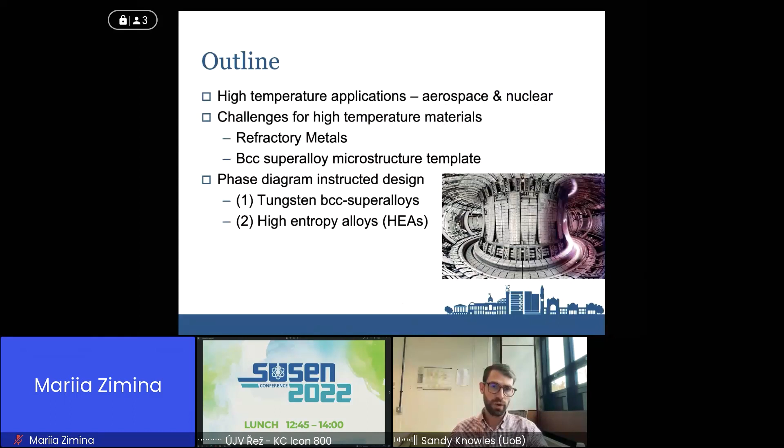So I don't know, I think there's still some aerospace research. I kind of saw at least a couple of colleagues when I was at CVR that are working in aerospace, and maybe other people in the audience have multiple application areas they work in.

But when we're working on gas turbines, we're particularly interested in improving fuel efficiency, and often that comes into improving the operating temperature of the engine. So higher operating temperatures give you improved thermodynamic efficiency. So the same motivations we have in next generation nuclear as well. If you want high temperature reactors, you get this improvement in thermodynamic efficiency.

In aerospace gas turbines, a lot of what limits increasing temperature is materials capability. So in aerospace we work on nickel-based superalloys, where nickel is the main material. Over time these have been continuously improved—every 10 years or so we get about a 50 degrees C improvement in temperature, but it's becoming ever harder to realize. We had an initial, fairly linear progression, but over the last couple of decades it's been really hard to get much improvement in nickel superalloy properties.

As a research group working on aerospace materials, one question is: what are we doing? Have we hit some physical limit, or are we just getting iterative improvements where the more money we spend, the more improvement we get? Or are there fundamentally new materials we can consider that might give a step change in performance? I think now, going from kerosene-based gas turbine engines to hydrogen gas turbine engines, this might be the point when we start really looking at fundamentally new technologies.

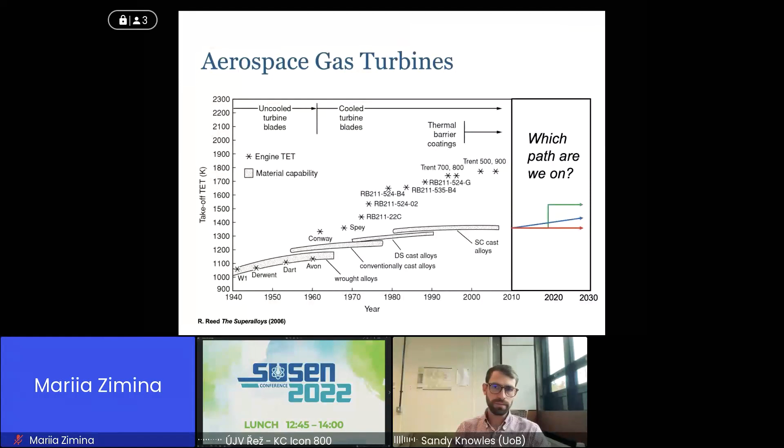Looking towards DEMO, which might be 2050, or alternatively some private companies doing fusion—like Tokamak Energy in the UK or Commonwealth Fusion Systems out of MIT—these companies are targeting feasibility by 2030 and power by 2040. But regardless of reactor type, plasma physics, or reactor geometry considerations, the key question is which materials can function in a power plant under fusion-spectrum neutrons for 20 years.

That's really something we don't know—how our current suite of materials would perform in a fusion environment. We're doing everything we can to demonstrate them, but there's probably also going to be a need for some fusion-optimized materials, made for both temperature requirements and radiation damage.

The last application our group works on is next generation fission. There are similar motivations around thermodynamic efficiency, improvements in reactor conditions, and waste production. Something we're particularly interested in is the benefit of high temperature processes for hydrogen production—if you look at reactor temperatures more in the range of 800 to 1,000 degrees C, it opens up new thermochemical processing routes for hydrogen, which would be a very good way of making low carbon hydrogen.

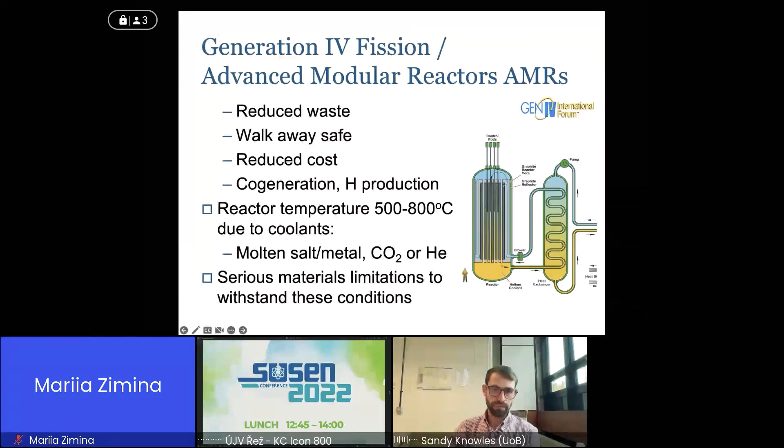This leads us to: what's so hard about meeting the requirements of high temperatures? One thing is we just need something that's not going to melt, but we probably need to go further—it needs the right mechanical strength, we need to think about creep, damage tolerance, fatigue, and environmental resistance, including corrosion, oxidation, and also radiation damage.

And also, can we really manufacture it at the scale we need, as well as at adequate cost? This is originally benchmarked for nickel-based superalloys, more for aerospace, which do pretty well on all of these criteria. They're pretty expensive, but otherwise a pretty phenomenal material.

If we go to a new materials class, something like silicon carbide composites, which are also considered for Gen 4, you get some benefit in strength and creep resistance, but maybe that's at the detriment of cost and processability. So whenever we're developing a new material, we have to try to ideally balance out all of these different properties.

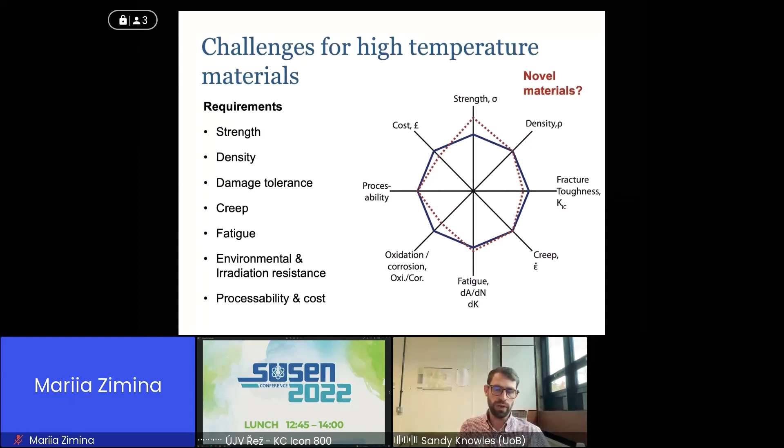So it's not just designing for a single parameter, we have to try and design for all of them at once. And we're really trying to get novel materials where it's not a complete sacrifice. Maybe it gets a good benefit in strength, but you don't lose out in other parameters.

So for us, we take a lot of inspiration. I did my PhD in aerospace materials and previously worked briefly at Rolls-Royce, so we take inspiration from aerospace and try to bring that into the nuclear sphere.

Some people in the audience might be familiar, but I'll give a brief introduction to what nickel-based superalloys are. These are materials that have exceptional high temperature strength, creep resistance, and oxidation resistance. Fundamentally, these are comprised of FCC nickel as a matrix phase, and this intermetallic, nickel-3-aluminium, which gives you a composite benefit almost, where you have a very high strength intermetallic phase and a ductile matrix phase.

And you get these cuboidal bricks and mortars, where the bright cubes are the intermetallic and the channels are this gamma. So you have a very high volume fraction of precipitates.

And we can design these alloys fundamentally instructed by phase diagrams. So I spend a lot of my time going into different phase diagrams and trying to understand how we can use them to design and control microstructures.

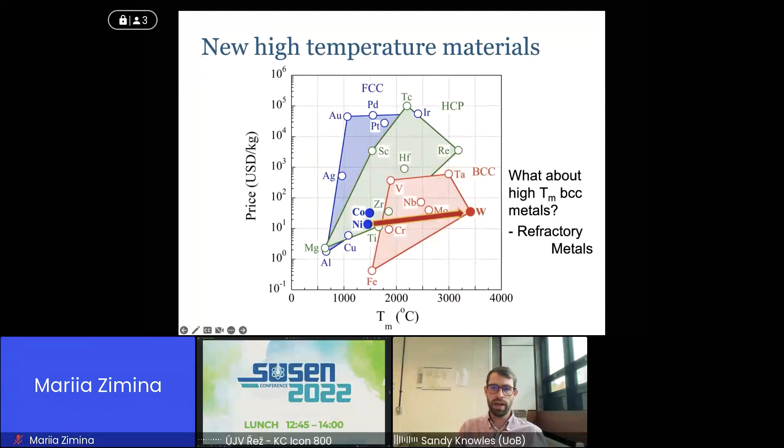So going there, we've run out of FCC metals. We can't take a direct analogy to nickel-based superalloys, but we consider, well, what about some of the other high melting point metals? We could particularly jump, rather than being FCC, to BCC. So we have all of what we call the BCC refractory metals, and particularly things like tungsten. So why not consider these high melting point metals?

And we asked the question of, well, if this gamma prime microstructure is so effective, is there an analogy to consider a BCC based system, so a beta prime? And this is what's kept me busy for, I guess, coming up to 10 years now, working on this concept of BCC superalloys. We're really trying to take inspiration from gamma prime, but now that we've changed to a BCC base, we also need to change our intermetallic species.

So we have our kind of BCC unit cell that people may be familiar with. There's lots of different metals that we can have as our base BCC matrix. And then we can consider, well, what is a beta prime intermetallic?

The simplest one is what's called the B2 crystal structure, where the center atom is ordered and your corner atoms are different species. So things like titanium iron, or more commonly, nickel aluminium. There was a huge amount of work on monolithic nickel aluminium, so nickel aluminides, through the 90s for aerospace applications.

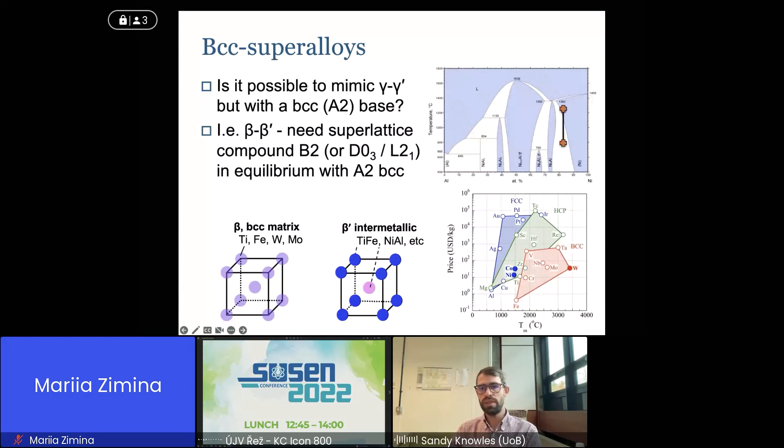So there's many of these B2 or beta prime intermetallic species, but one of the real challenges is, if we try and do the same thing we had in nickel alloys, we need this equilibria between BCC and the intermetallic.

So we can ask which systems, is there just a binary system that directly gives us this kind of beta-beta prime structure? One of the only ones really is technetium. So tantalum technetium, titanium technetium do have a two-phase field between BCC and the B2. But technetium has no stable isotope, so it's not something we're going to be making engineering structures out of, but very interesting from a scientific basis, or maybe for medical treatments and things like that.

So the only binary system that really works towards a beta-beta prime structure is the titanium iron system. This was what I spent a lot of my PhD researching, and we still have ongoing projects trying to understand that as a binary system. You'd think iron metallurgy and titanium metallurgy, this would be a quite well-determined system, but actually people haven't mostly been interested just in the edges of the phase diagram and not this kind of region in the middle and quite what happens there.

But what we found is that you can have an equilibria in high temperature titanium alloys, so beta titanium, which are used commercially. If you keep adding even more iron, at some point you get to the point where you form this titanium iron intermetallic.

And so we've done a number of bits of work looking at trying to use this binary as the base to create a beta-beta prime or a beta titanium BCC superalloy. So taking the titanium matrix and having precipitation of titanium iron, you either get some spherical or lamellar precipitation structures. So we've done work looking at the strength and the formation of these kind of microstructures.

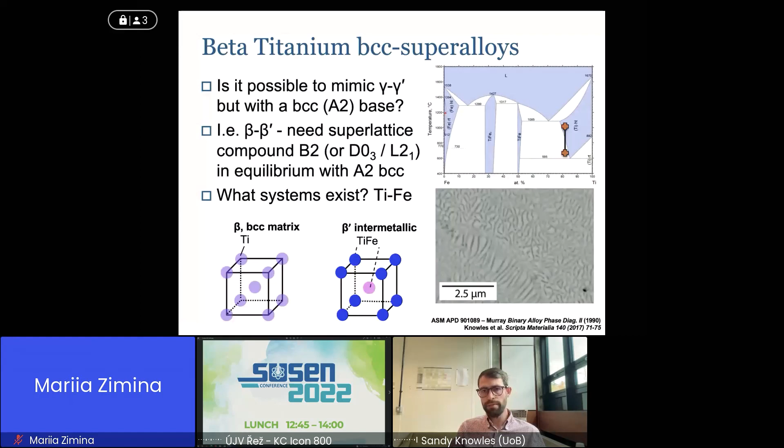Taking in the rest of the literature, we're not the only people to have pursued this kind of BCC superalloy concept. So there's other systems, but none that have really reached commercial maturity. And hopefully there's a few different directions we could go in that maybe could get us there.

One of the ones that's picked up quite a lot of interest internationally has been refractory high entropy superalloys. This was a review paper, a Perspectives paper just published last year or so, two years ago. And at some of the major conferences, you're now seeing quite a lot more people looking at these, what I would call high entropy BCC superalloys.

So you can get this kind of gamma prime cuboidal sort of structures. So certainly something that's seeing widening appeal in the scientific literature.

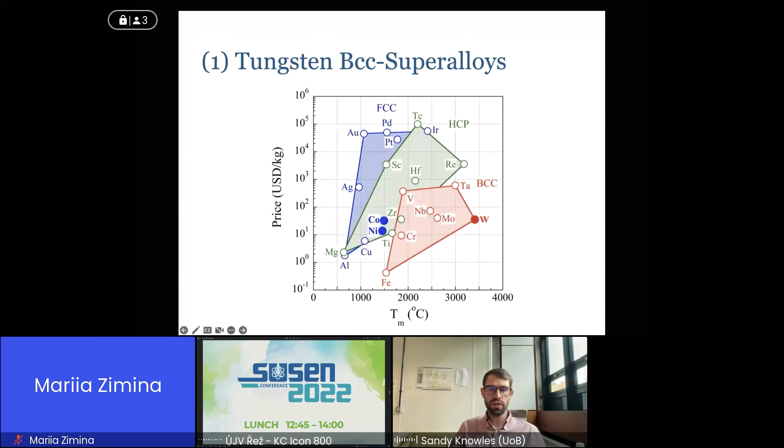So we've been applying this BCC superalloy concept to another system. We previously worked on titanium alloys, and then, as I was mentioning, around this Eurofusion project we had on nanostructured tungsten. And during that, we wanted to have tungsten with precipitates. So we tried to see if we can apply this BCC superalloy concept.

So we got the motivation of BCC as high melting point. Essentially, this beta prime could be a reinforcing phase, but we also have interest in terms of the interfaces towards radiation damage. Well, the challenge we had is that there wasn't very much prior study of this system. I guess that's probably what interested me in it.

And one of the questions we had is, is there this kind of equilibria between BCC tungsten and titanium iron? And this would be, are BCC superalloys even possible? And so then the next question is, are they useful? And I guess we're still answering that question, but they're certainly possible.

In this kind of study, one of the things we were doing was making real alloys. So we have alloys going from tungsten rich with 20% atomic titanium and iron, and these kind of go across in increasing titanium concentration.

What was interesting, and we were aware of but didn't know if we would see it, is that there's also a second or third phase of BCC, which is BCC titanium. So as well as having this two-phase miscibility gap between having the beta prime, there's also a spinodal reaction, so you actually have a three-phase structure: two BCC phases and then this beta prime titanium iron.

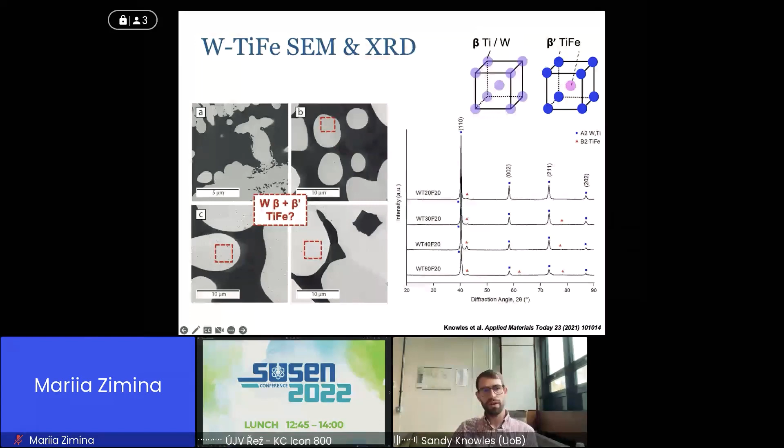But in having done it, we were interested within the dendrites, so the tungsten rich phase, we could see there was kind of a secondary feature within those dendrites. One of the things was just porosity, but it didn't really seem consistent with that from the imaging. The question was whether this is the beta prime microstructure we were really seeking.

So we could zoom in and do TEM to validate both the chemistry and the crystallography, and we found that we do indeed have this beta-beta prime structure. And we could start to probe into the performance of the alloy.

Whilst we've done this experimental work to determine the phase diagram, we can take that into a CALPHAD thermodynamic assessment. The ultimate aim is to try and do more prediction on these alloys, but if you don't have an understood phase diagram, you can't use many of the current predictive tools. We're trying to develop that predictive capability.

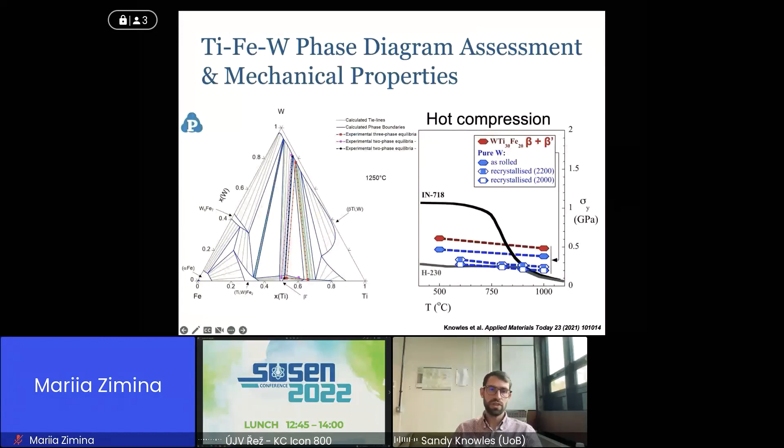We also then started looking at some mechanical behaviors. In these, we're doing just hot compression, but up to 1,000 degrees Celsius, and we're seeing massive benefits over state-of-the-art nickel-based superalloys or tungsten as a direct analog. So there's an advantage to having this tungsten material as well as having the beta-beta prime microstructure.

The secondary interest for us, as well as trying to get the mechanical reinforcement, is also to create interfaces. Between beta and beta prime, you'll either get a coherent or semi-coherent interface, so some interfacial dislocations and interfacial strain, and potentially that could be hugely beneficial for irradiation damage.

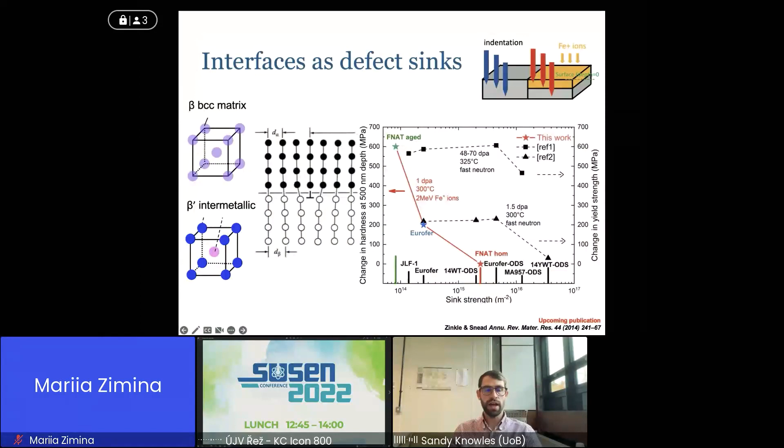There's a lot of work on oxide dispersion strengthened materials, which shows that if you have sink strength, so high area density of interfaces, this can help reduce irradiation hardening, and hopefully that can improve your irradiation damage tolerance. So we have a number of bits of work looking at creating nanostructured materials and understanding the irradiation performance.

Particularly, there's lots of very good irradiation facilities at CVR. In Birmingham, we're very fortunate to have our own cyclotrons, so we can do proton irradiations up to temperature, as well as getting upgrades for in situ corrosion and mechanical loading, including high temperature.

And we've received, and I think by the end of the year it will be operational, a neutron accelerator. I think we can still get up to 0.1, maybe a bit more DPA, so we can start to do some irradiation studies as well as neutronic studies.

This is probably one of the higher energy accelerator, high energy and damage levels for an accelerator system, compared to if you go to reactor-based systems where probably you can get some higher damage levels. But there are differences in terms of the energies involved as well.

So I'll do a whistle-stop tour through also on high entropy alloys. This has been an area seeing massive research in the community. Nickel-based superalloys, which are used in every single jet engine and fund many research groups internationally, there are now more papers published on high entropy alloys than nickel-based superalloys. So scientifically, they've become very interesting.

I think there's a fair few patents out in this space, but I haven't yet seen one fully commercialized, though they are massively catching interest. The idea in a high entropy alloy is this concept of, rather than having a single base element, if we consider this kind of a ternary diagram, but it also extends into higher order compositions. So we first were talking about tungsten alloys.

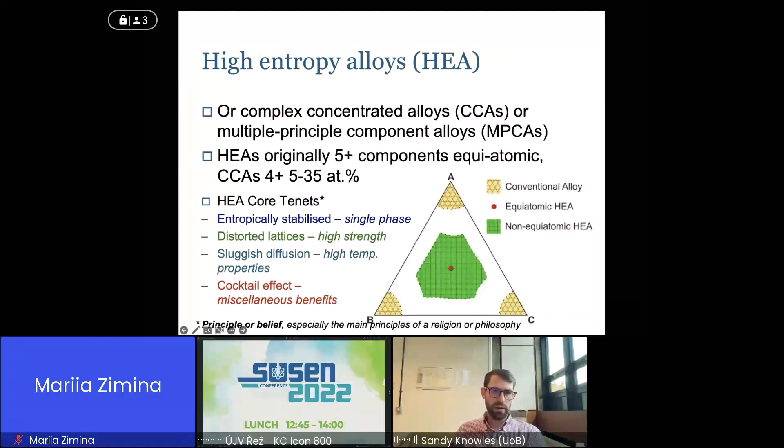So in high entropy alloys, there was this idea that it's because you're mixing lots of elements together that you're gaining an entropy, and hence the name. So maybe you get entropic stabilization.

And there's a number of other benefits that seem to be coming out of this, particularly towards high temperature strength and slow diffusion. And also one of the ones that catches a lot of my interest is that quite a number of high entropy alloys are showing a very good irradiation damage tolerance, potentially much better than conventional materials. So that's a very interesting concept for us to understand and also to exploit.

The challenge with high entropy alloys is you can have any high entropy alloy, you can just mix any element you like and put them together. Maybe if you put 4 or 5 plus, that is a high entropy alloy, and that means we have almost an infinite number of possibilities of how many high entropy alloys we can make.

So if we're going to choose a new research study, we could potentially take a good starting point. So we've got the Cantor alloy, which we could look at and take as a starting point. I quite like the joke one, we could play dartboard metallurgy and design a different master's project or summer project, and we could just throw darts and pick elements. So we could do zirconium, vanadium, molybdenum, zinc, or something like that, and that could be a new high entropy alloy, but probably we need to be a bit more scientific than that.

We can use things like CALPHAD thermodynamic predictions, or maybe some other modeling methods. So all of these have challenges, particularly in CALPHAD, as we were saying in the tungsten-based superalloys, is one of the challenges. If you don't have the prior data, you can't make a good prediction.

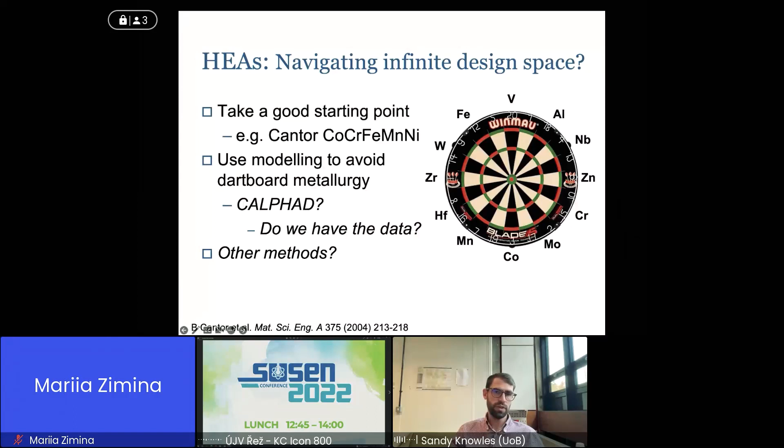So we've been looking at some high throughput modeling screening methods. So put my hand up, I'm an experimentalist. I was working with Dan King and Simon Middleburgh on this. They're the sort of modelers, and trying to use this.

This was actually a data library approach, looking at atomic size misfit as well as then your propensity to form a solid solution. So your Gibbs free energy of mixing versus intermetallic formation. So we have these 2 parameters, things with not very large atomic size misfit, as well as a low driving force for intermetallic production.

And the nice thing was with this approach, which the code is publicly available, we could screen, in this case, 100,000 compositions, and we've subsequently done another study where we've done over 1 million high entropy compositions. And we were interested in both those that might be a single phase solid solution, as well as ones which might have a low thermal neutron cross-section.

So particularly we were interested in these as potential fuel-clad materials. So we came across this system, niobium, titanium, vanadium, zirconium, and noticing that of those 4 elements, zirconium is probably the lowest neutron cross-section. We then did the derivatives looking at changing the zirconium concentration to change the neutron cross-section.

Having defined these compositions in this system, we applied CALPHAD to see how well it predicts behavior. It predicted a single phase: as we go down in temperature, first you're liquid, then you form solid BCC, with a large temperature range in which BCC is stable. At low temperatures, we might get some mixture of phases between Laves, spinodal, and HCP.

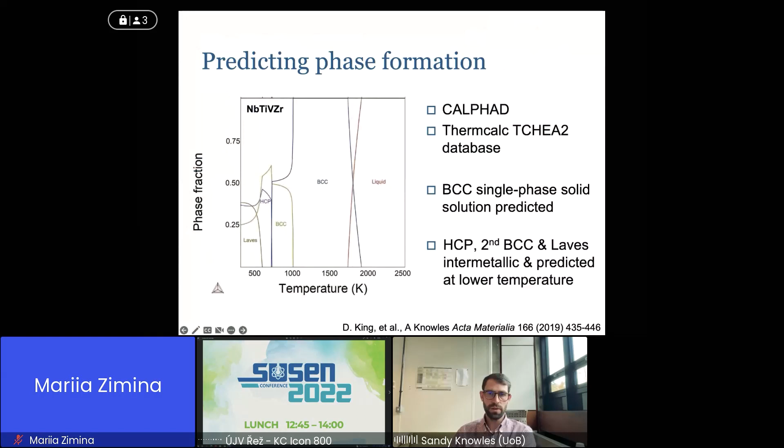We then produced these alloys experimentally. One caution with many high entropy alloys is how they're produced, often with very high cooling rates, raising the question of whether they're truly stable. Since we want to use these materials in a nuclear reactor, they'll sit at high temperature for a long time, so they need to be temperature stable.

In this system, we found that these niobium, titanium, vanadium, zirconium high entropy alloys are single phase stable at 1200 degrees. So they do meet this criteria of being a high entropy alloy, suggesting there is potentially some entropic stabilization involved.

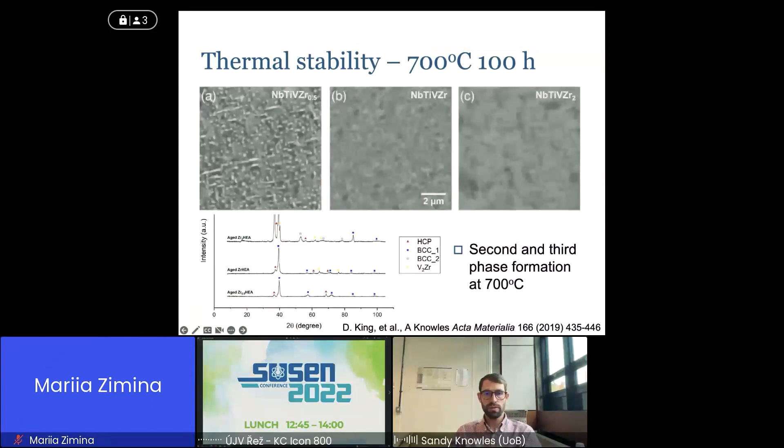However, wanting to move toward reactor operating temperatures, at 700 degrees C you get precipitation forming second or third phases. Depending on the composition, particularly zirconium concentration, we got differences in microstructure, including some spinodal, some HCP formation, as well as Laves phase formation.

So we went into more detail to work out exactly which phase is which, going into TEM, doing composition analysis, and linking that to the XRD and diffraction to identify the phases.

We then went on to compare the base mechanical behavior, in very preliminary studies just looking at hardness. These alloys are about twice as hard or twice as strong as the zirconium and steel currently used. So you might argue that if you can make things a bit stronger, you can also make them a bit thinner, so there may be some advantages there.

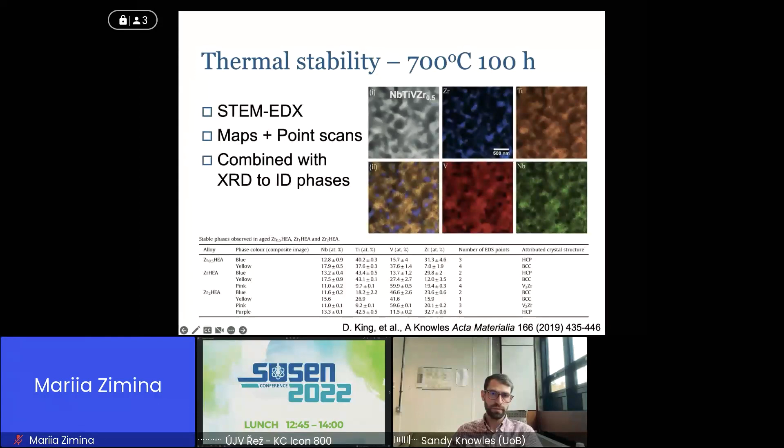Having multiple phases isn't necessarily a problem for us. We're also interested in high entropy alloys that have precipitates - in the same way we had nanostructured tungsten, why not have nanostructured high entropy alloys? We could use these second phases for improvements in mechanical strength and high temperature strength, as well as irradiation damage resistance. So we have a number of different projects.

We've just had two PhD students start, and we've got two postdoctoral research fellows working in this area, particularly around whether we can control and optimize the phases and get the best balance of mechanical versus irradiation performance.

We also have interest toward fusion and reduced activation high entropy alloys. For fusion, certain elements become very active, which would mean your entire fusion reactor becomes long-lived radioactive waste, defeating some of the initial motivation for fusion. So we're looking at compositions that would meet the criteria of ideally becoming low-level or low-activity waste after just 100 years.

To summarize, we've been exploring these concepts of BCC superalloys and high-entropy alloys, particularly using phase diagrams to instruct the design. Generally we're finding that they are possible and interesting, and demonstrate high strength, but there are some challenges in ductility, particularly in tungsten-type BCC metals. So we have a lot of work focused on designing for toughness and microstructure, as well as linking that into irradiation and environmental resistance.

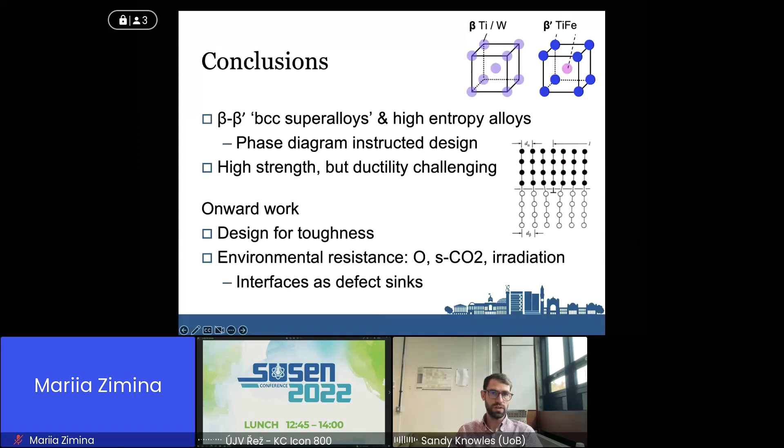Happy to take any questions.

Thank you, Sandy, for an extremely interesting presentation on another set of materials, which are, as you said, now largely being researched - high entropy alloys.

So is there any question? I would say it's because it's after lunch, you know, but our audience is a little bit shy.

I know that you have been lately in CVR, and you are also working on COMPASS with our colleague dealing with materials for supercritical CO2, so we have really a large portfolio. Just out of curiosity, did you come to some common ground that our collaboration will continue or might continue also in the direction of, for example, high entropy alloys?

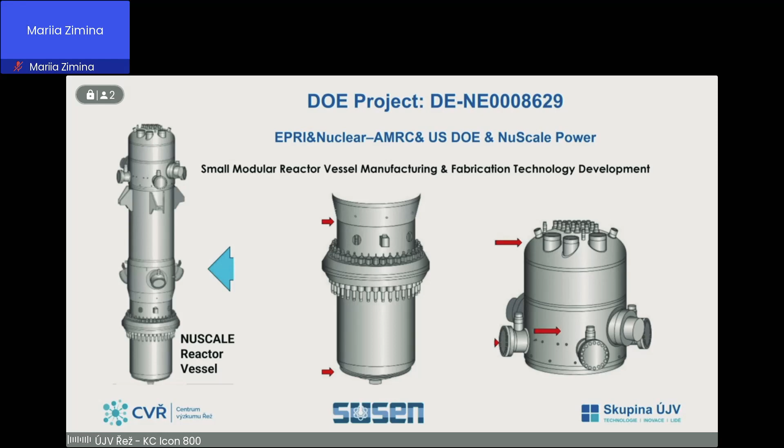In this part of my speech, I will talk about the technology for production of thick-walled components from metal powder, which is consolidated by isostatic hot pressing. With this technology, it is possible to produce near net shape and very complex components, which reduces overall machining time and material cost. This technology is ideal for manufacturing components with multiple penetrations, such as reactor heads. It also produces very homogeneous microstructures, has excellent inspection characteristics, and in some cases you can actually eliminate welds.

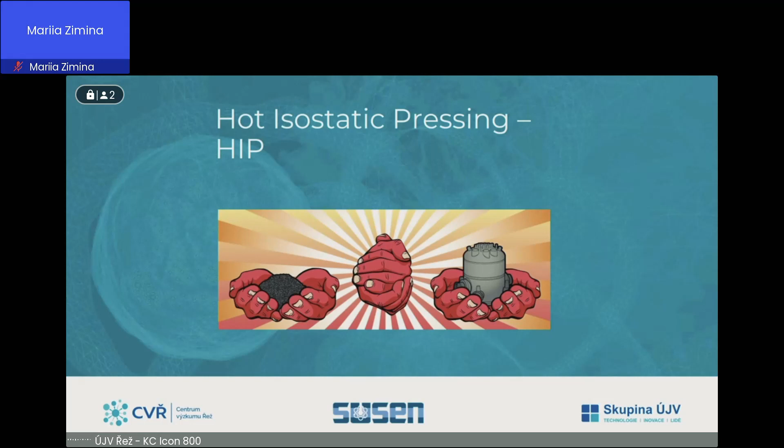There are many ways to use hot isostatic pressing. The most common is densification of products—densifying castings, 3D printed parts, or parts produced from metal injection molding. Another way of using HIP is to consolidate powder, called PM HIP, where metal powder is consolidated in a canister or mold into a solid piece.

In this way, you can design a part with near net shape. Diffusion bonding is the third way to use HIP, which creates seamless diffusion bonds of similar or dissimilar materials with different melting temperatures.

What is hot isostatic pressing, or HIP? The definition of the process is to apply a pressure distinctly higher than the yield strength of material at the HIP temperature. So we have high pressure and high temperature, and at this elevated temperature the yield strength of the material will be very low. We all know if we apply a stress higher than the yield strength to a material, it will drastically deform.

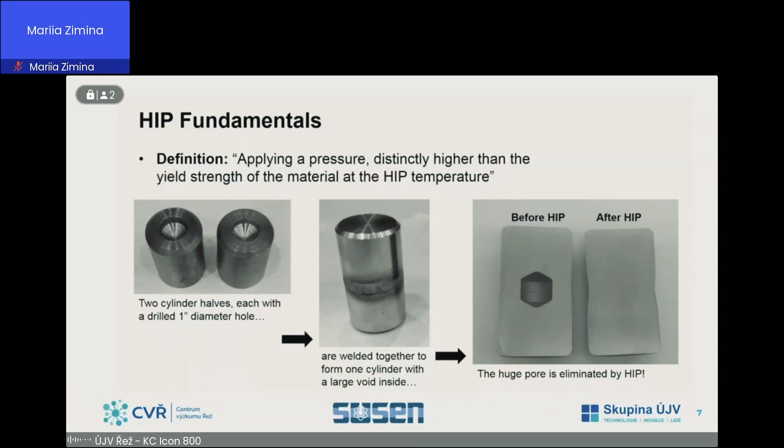Hipping will also eliminate internal defects. Any surface-connected porosity or surface-connected feature will not be eliminated by the HIP process, since the pressure medium can penetrate this feature.

The shrinkage in the process corresponds to the amount of densification we have. So, for example, if we have material with 2% porosity in the part, and we hip it to 100% density, we will get 2% shrinkage by volume. If the porosity is homogeneously distributed in the material, the shrinkage will be homogeneous all over the part.

The HIP furnace can be made for several different materials for different temperature ranges, for temperatures up to 2000 degrees Celsius and pressures up to 2000 bar. The density of argon at this high pressure and high temperature is very close to water. The densification process is a combination of plastic deformation, creep, and diffusion. Isostatic pressure means that the same pressure is acting on all component surfaces in all directions, and it is achieved by a gas pressure medium.

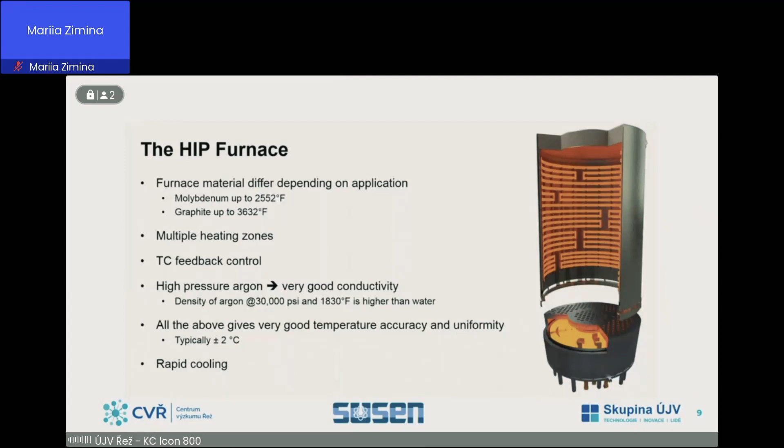The production process HIP begins with the procurement of steel powder used for the manufacture of nuclear reactor pressure vessels, for example steel 508. For filling the mold, canister is needed the metal powder, atomized at gas, with spherical morphology and in a very wide particle size distribution.

Then we have to encapsulate this powder, which is based on creating a mold. When the mold has been created, we can essentially fill the powder into the mold. After that, we need to remove the atmosphere via some degassing process, either cold degassing or hot outgassing. When we have the powder in vacuum in the mold, it is ready for HIP consolidation.

In the case of steel 508, at temperatures in the region of 1160 degrees Celsius and argon pressure of around 100 megapascals. This is followed by heat treatment. The last operation is the removal of the canister, done either by pickling or machining.

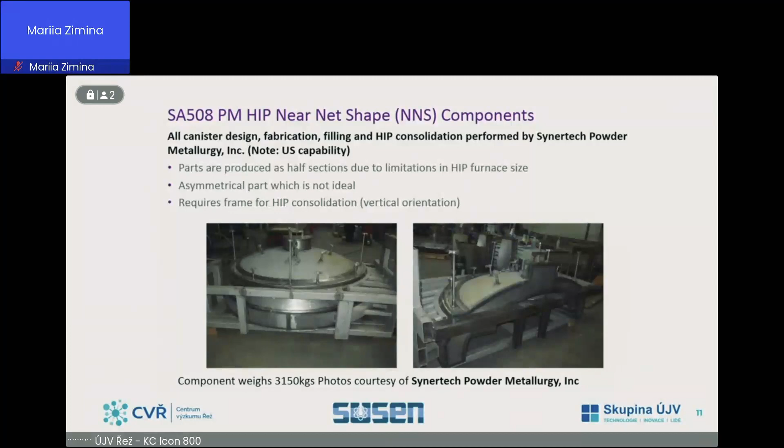The other very important technology for production of components for energy and nuclear industry is electron beam welding.

Electron beam welding is a joining process that is commonly performed under high vacuum, approximately 10 to -4 torr, in a suitable chamber. The chamber prevents scattering of the electron beam during welding and shields the high-energy X-rays emitted during the process.

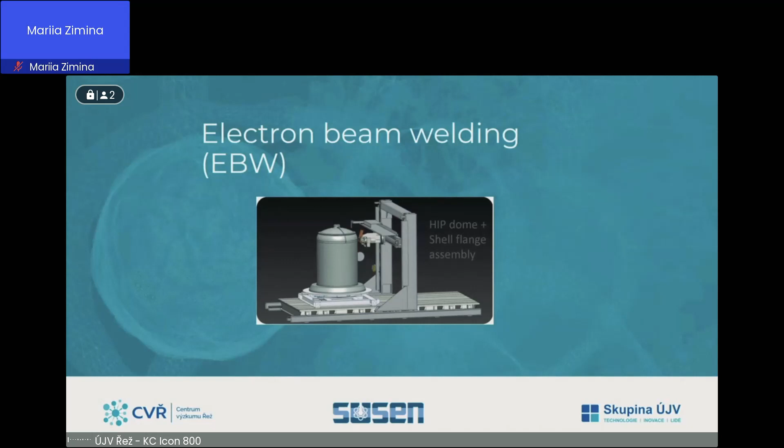Electron beam welding process is extremely efficient, and welding time can be reduced 100 times over conventional thick section welding processes. Post-heat treatment effectively recovers the properties in the fusion zone as well as the heat-affected zone. Heat treatment provides properties similar to the base metal properties while eliminating the visual evidence of the weld.

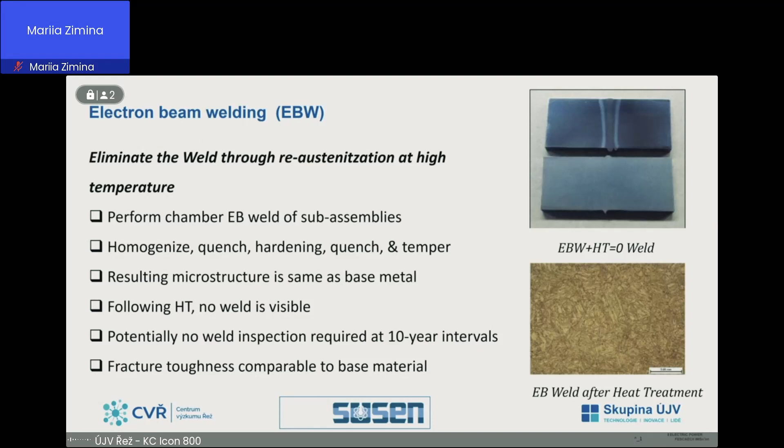Research in the Nuclear AMRC welding vacuum chamber has demonstrated that electron beam welding can provide an acceptable joining method for reactor pressure vessel materials, both forged and produced by powder metallurgy.

Conceptual design of the device for welding the NuScale power reactor pressure vessel is shown in this picture. The design uses individual modules that can be stacked and destacked to form the vacuum chamber, wherein various sections of the small modular reactor vessel or other component will be assembled via electron beam welding.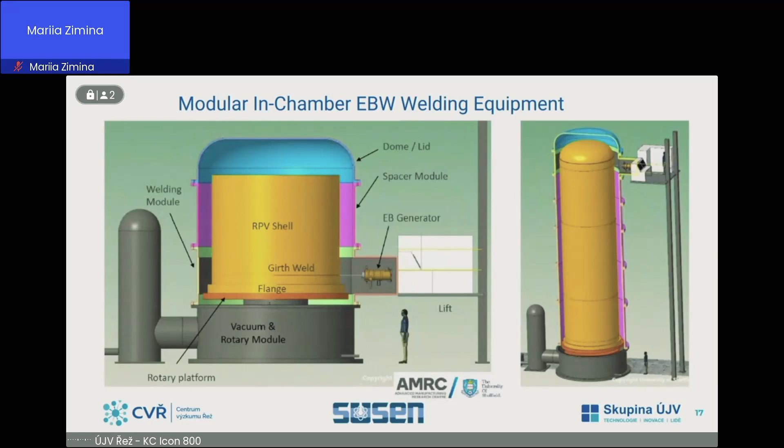In this picture, you see welded lower assemblies for the NuScale power reactor vessel with welded joints flange to shell and shell to dome head.

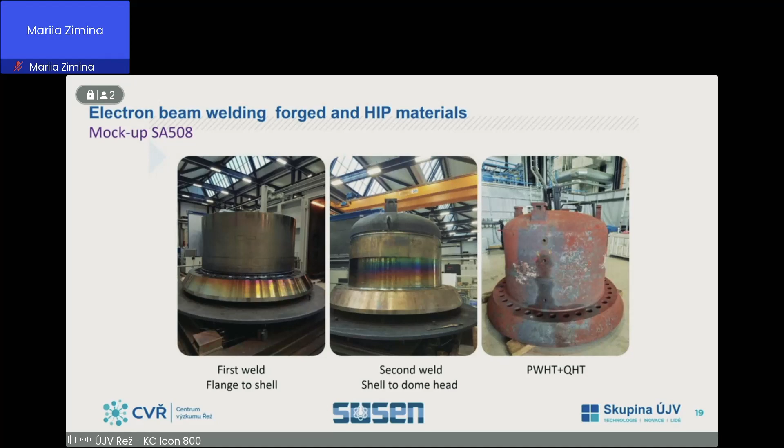Now, several words about metal additive manufacturing. Additive manufacturing is the process of manufacturing a solid object of any complex shape using a digital model as a guide to add layers of material.

Additive manufacturing today represents a range of new manufacturing technologies that have already found application in many industries. One of these technologies is 3D printing. The Electric Power Research Institute issued a technical roadmap for the implementation of additive manufacturing of metallic materials in the nuclear industry under the Advanced Nuclear Technology Program. For 3D printing of metal components, powder bed fusion and direct energy deposition technologies are at the most advanced stage of development now.

Powder bed fusion is an additive manufacturing process in which thermal energy selectively fuses areas of the powder bed. Technology advantages are the ability to create complex geometries that cannot be produced by conventional manufacturing methods, and the ability to produce functionally graded materials in which the chemistry or structure gradually changes as a function of position.

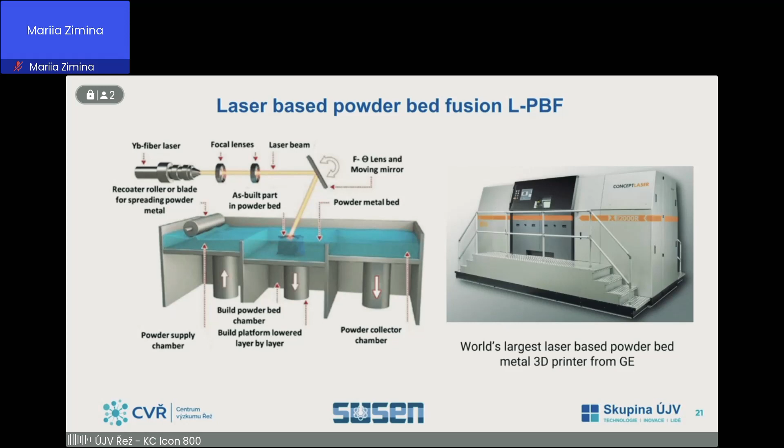Another additive technology is directed energy deposition, which is an additive manufacturing process in which concentrated thermal energy is directed to melt deposited materials. The process consists of depositing individual layers of powder produced by a gas atomization process, with thickness of approximately 0.25 millimeters.

Advantages of this technology are a higher deposition rate, allowing the production of larger components with mass up to 250 kilograms. Mechanical properties of such components, such as tensile strength, impact work, and hardness, have been shown to meet or exceed the properties of the same type of forged material.

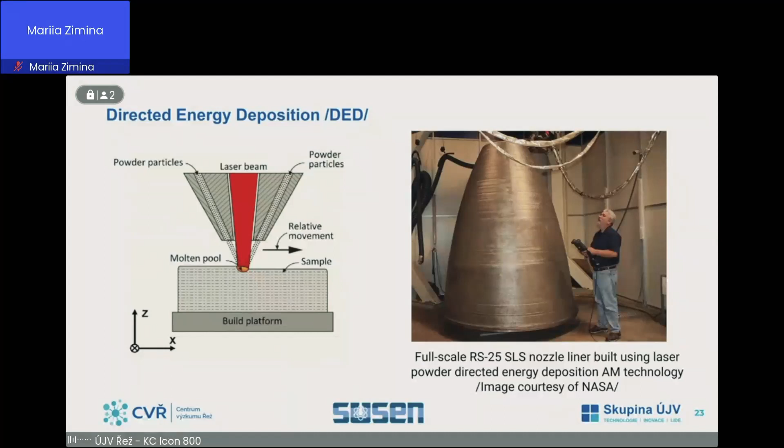And the last technology I would like to say something about is diode laser cladding. Laser cladding is a deposit overlay technology which uses a high power industrial laser to melt or weld material into a substrate, creating an overlay with true metallurgical bonding.

Laser cladding is a very competitive alternative to traditional arc-based cladding methods. Due to much lower heat input, the technology can be used for cladding large surface areas, and can also be expanded to applications like repair or additive manufacturing. Almost all types of lasers can be used for cladding, but diode lasers offer many advantages thanks to their relatively low cost of purchase and operation.

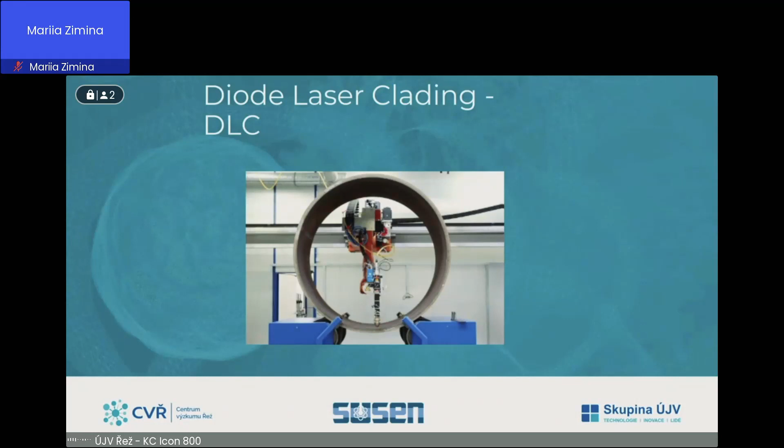The main potential advantages of diode laser cladding are: it can be used out of position, whereas conventional cladding is performed in the downhand horizontal position only. Significantly smaller amounts of cladding powder are required, which could lead to substantial cost savings over conventional processes. And weld dilution is substantially reduced over conventional welding methods, resulting in a much smaller heat-affected region.

The potential cost savings from this technology is substantial, assuming that the thickness of cladding can be reduced by over half compared to conventional cladding methods. For the NuScale power reactor, which is clad over both the inner and outer surfaces, the amount of cladding surface area is projected at almost the surface area of 2 Olympic-sized swimming pools.

The nuclear MRC operates a 15 kilowatt laser line fiber coupled diode laser, controlled by a large gantry-mounted robot manipulator within a 10 by 10 by 5 meter space, safely and reliably.

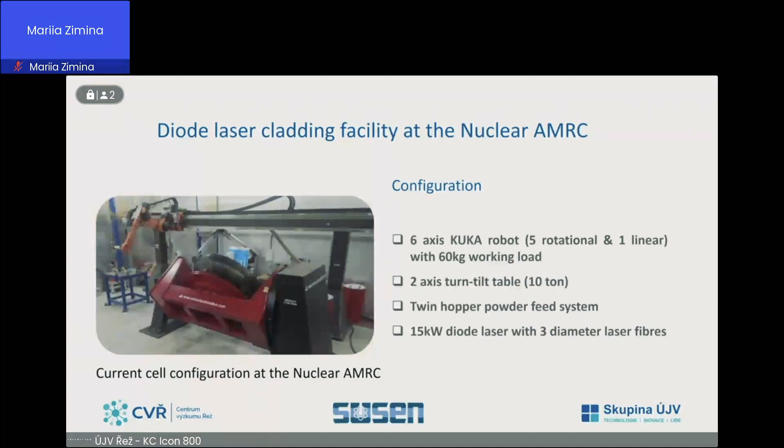The cladding procedures are being developed using 3 welding orientation positions as described in ASME section 9: 1G flat, 2G horizontal up, and 3G vertical. In the picture you can see deposited layers of austenitic steel 308L on the base material.

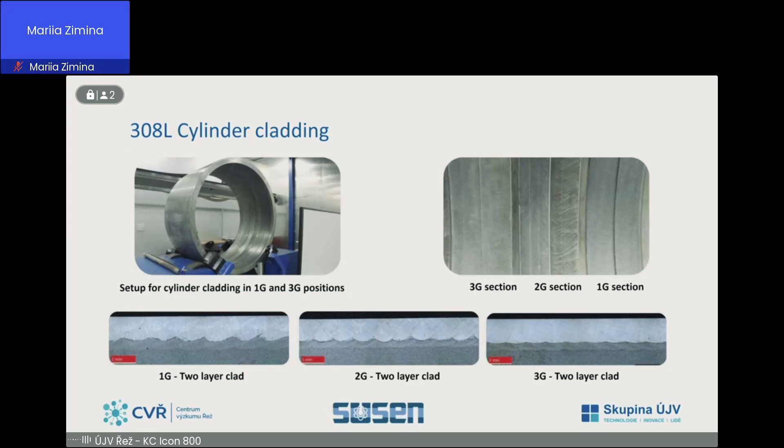The application parameters of the corrosion-resistant coating vary with respect to the inclination of the surface to be treated, so every surface is done under different conditions.

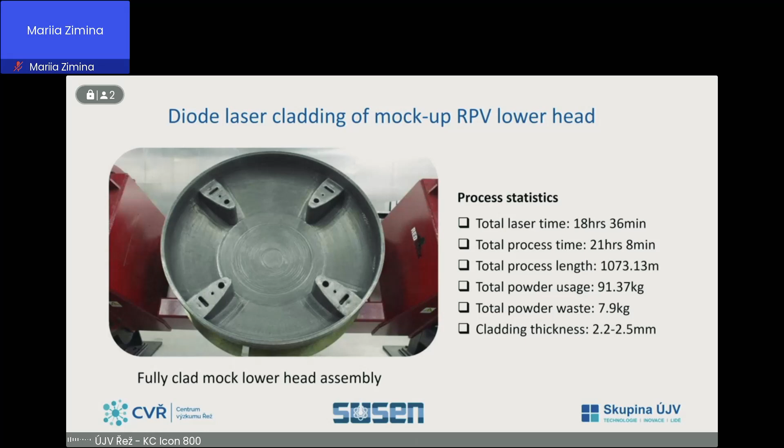I thank Josef very much for a very nice overview of advanced manufacturing techniques focused on additive manufacturing. For me it was a very interesting overview. It seems that we will be able to see a completely printed nuclear reactor soon, including the fuel assembly. Okay, are there any questions? I see the audience is quiet today.

I would like to ask one thing: what would be your preferable technique from what you were presenting? I mean, what do you think is closest to application?

I think that it would be reasonable to start doing hipping. Because 3D printing is a technology on every street now, in every laboratory, but hipping is not yet available in the Czech Republic.

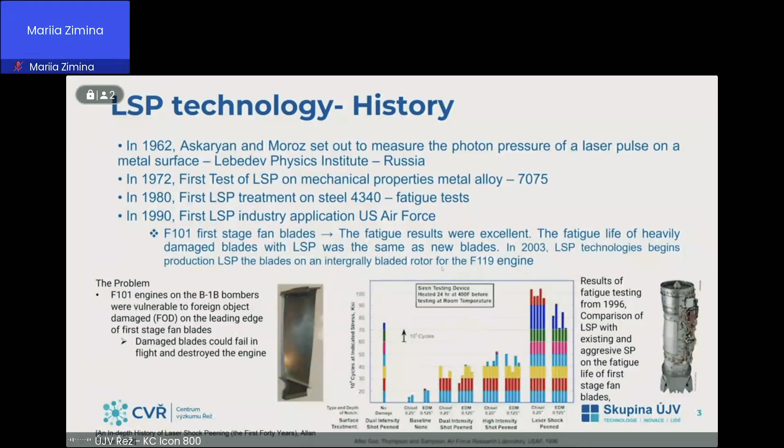From 2003, the LSP technology begins production of LSP blades on the integrally bladed rotor for the next generation engine of airplane.

The second important industrial application was in 1999 in Japan, when Toshiba used LSP to periodically service critical components on the reactor vessel. The reason for this was to increase the resistance of components and welds to stress corrosion cracking that occurs in these types of reactors.

This method improves resistance to stress corrosion cracking in critical areas, like welded joints, H1 and H2 and so on, in a nuclear vessel. The guru of this technology for nuclear vessels is Professor Yuji Sano.

And the method substitutes a tensile stress, which is present after the weld, with compressive residual stress by LSP.

I would like to say a few things about LSP technology. LSP, laser shock peening technology, or laser peening, it's very similar. LSP basically achieves similar effects as conventional shot peening treatments existing in the industry for over 6 decades. In traditional shot peening, metallic, ceramic, and glass balls act as minuscule ball peen hammers, making small indentations on the metal surface on impact.

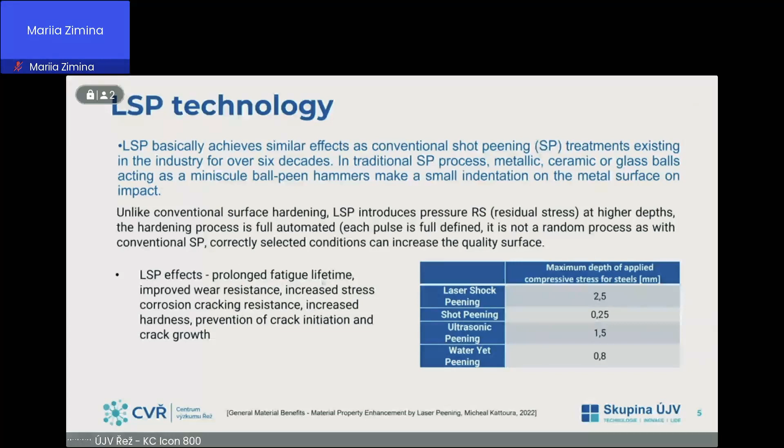And the LSP effects prolong the fatigue lifetime. It's very similar to classical shot peening, as you know.

Now a few words about the principle of LSP. The principle is based on converting laser energy into a shock wave that results in material plastic deformation and a redistribution of the residual stress. There are 3 steps of the process.

In the first step, there is a metallic surface with a sacrificial layer, like black paint or tape, or without tape when we use the method under water, and a plasma confinement layer, typically water or glass. Then the laser beam pulse is focused onto the sample, passes through the confinement layer, and is absorbed in the sacrificial layer. This absorption happens only in the sacrificial layer, not in the surface of the treated metal.

After the interaction, the plasma is created and rapidly expands, creating extreme pressure. The pressure must be higher than the dynamic yield strength of the treatment material. This is important.

Then the confinement layer increases the pressure even more, acting like a shield. The pressure causes plastic deformation of the part, introducing compressive residual stress into the surface layer, giving better fatigue properties, higher hardness, and so on.

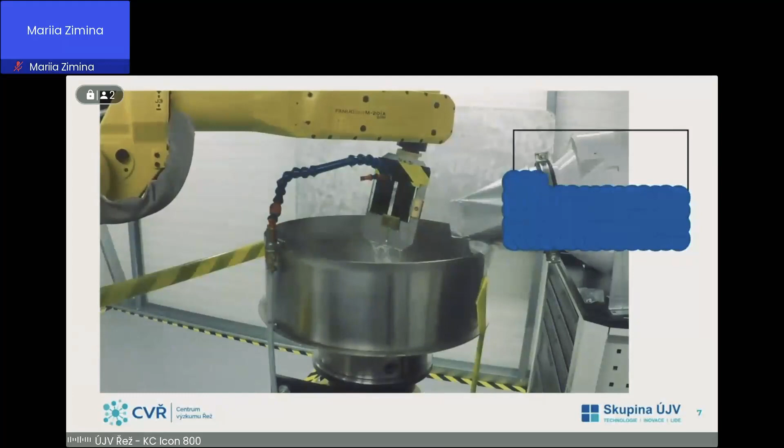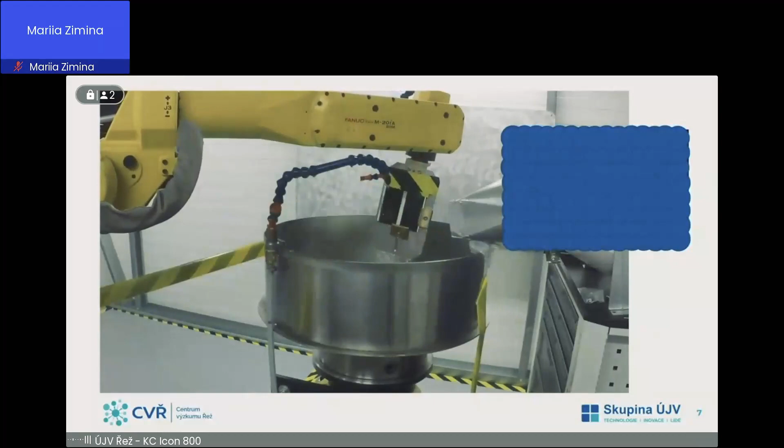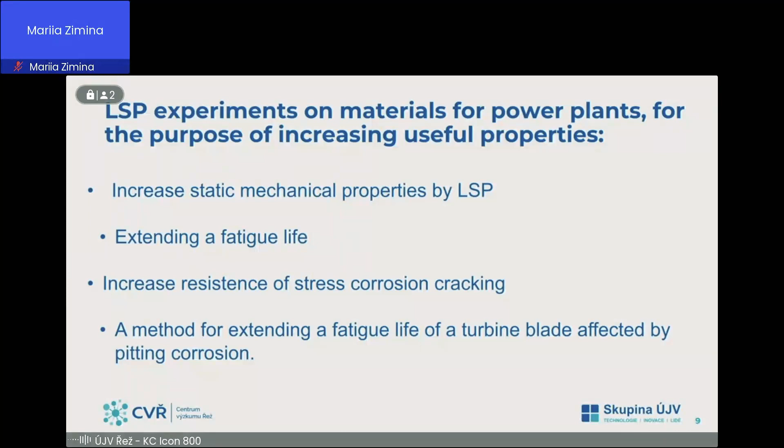Now there is a list of the mechanical properties which we could improve and increase: increasing static mechanical properties, extending fatigue life, increasing resistance to stress corrosion cracking, and a method for extending fatigue life of turbine blades affected by pitting corrosion. These properties are very important for materials used in power plants, nuclear power plants, and in the energy sector.

We used two base materials as experimental material. The first one is austenitic stainless steel, GOST 08CH18N10T. Austenitic steel stabilized by titanium with certification 3.1, which is a certification for application in nuclear power plants.

Austenitic steel is used for nuclear power plants based on Russian design. It's a classical material for the primary circuit. There are chemical compositions and mechanical properties: yield strength is 250 megapascals, ultimate tensile strength approximately 565 megapascals, and relative elongation approximately 55%. The second material was martensitic stainless steel, used for highly stressed turbine blades, with good creep resistance, corrosion resistance, hardened and tempered, with good toughness and good creep rupture strength. The mechanical properties are yield strength 760 megapascals and ultimate tensile strength 1100 megapascals.

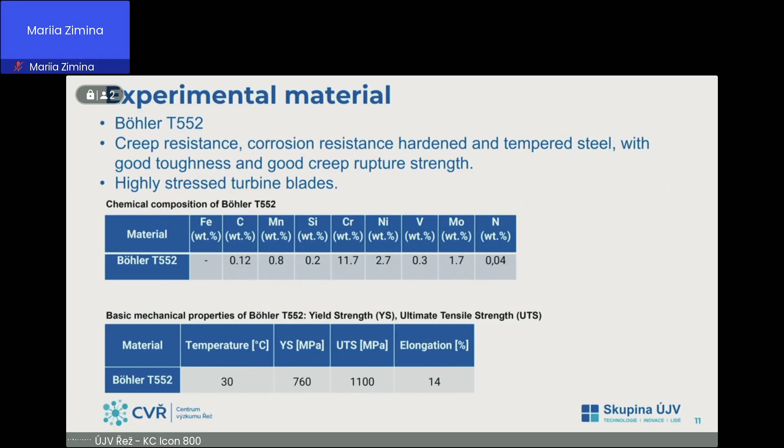We used two technologies and two LSP stations for our experiment. The first is the LSP station in HiLASE with the L2 Bivoj laser system, with wavelength 1030 nanometers, pulse duration 10 nanoseconds, maximum pulse energy 100 joules. It's a very powerful laser with a frequency of 10 Hz. The second LSP station is Continuum at the University of Cincinnati, Center for Laser Shock Processing for Advanced Materials and Devices. Its properties are similar, but the maximum pulse energy is only 5 joules. But that's not a problem for LSP application.

Setup for LSP treatment is very important when applying LSP technology. It's always important to set up the process well for the material, sample, or component. When we use LSP for a material or component, we must know where the critical area is, what the mechanism of degradation is, whether it's fatigue or stress corrosion cracking, where the problem is, where the location with maximum stress is, and we must know as much as possible about the behavior of the material, its properties, and how the component is loaded. Then we can modify LSP parameters for the application. The base parameters are energy, impulse, pulse height, power density, overlap, layering, and shot strategy.

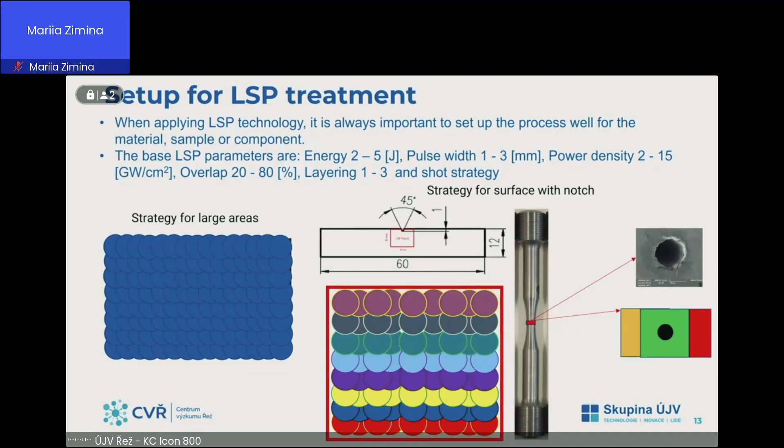On the slide you can see some strategies. The first strategy is for a large area, it's simple and good for increasing the hardness of the surface. For a surface with a notch, we used a special strategy with a lot of pulses, which you can see in the center. When the goal of the strategy is redistribution of maximum residual stress, compressive residual stress, it's applied to one point or a small area. Or we can use only one or three shots for the notch, as you can see on the right.

There are some results from tensile tests on the two experimental materials, showing results before LSP treatment and after treatment. You can see the yield strength of austenitic steel increased from 277 up to 481, and there's a similar effect on ultimate tensile strength. But in the second material, martensitic stainless steel, the effect of LSP treatment was very little, and the values of yield strength and ultimate tensile strength before and after are minimal, very similar.

There's a result of residual stress measurement analysis on a specimen for the 3-point bending fatigue test. The goal of the peening strategy was to move the maximum compressive stress to the critical area just below the notch, area 1. Area 1 is near the notch, where the maximum tensile stress occurs for high cycle fatigue, to suppress crack initiation and propagation. The other areas, 2 and 3, are farther from the notch.

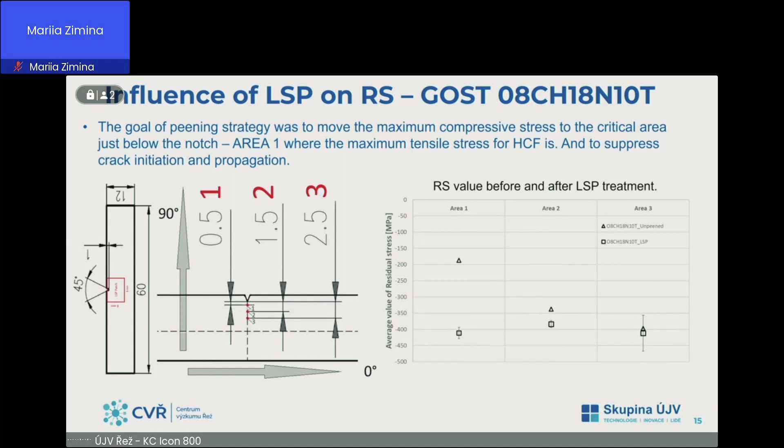As you can see on the chart of average residual stress values in each area, the maximum compressive residual stress was measured in area 1. The previous value was approximately 180 megapascals, and after treatment it was 420 megapascals. In the other areas the change was very little and not important, because the most important condition was in area 1. There's a result from the fatigue test of the same specimen, and you can see the fatigue strength increased from 180 up to 280.

There is a picture of specimens after peening of austenitic steel. The material was austenitic steel.

There are shortly results of a stress corrosion cracking test according to standard ASTM G36. The environment was boiling magnesium chloride solution, and the specimen was manufactured from pipe made of austenitic steel, with maximum tensile stress up to the yield strength, approximately 250 megapascals. The treated and untreated specimens were exposed for 20 hours in this environment, and then we performed metallographic analysis using light microscopy and scanning electron microscopy. In the center are the results.

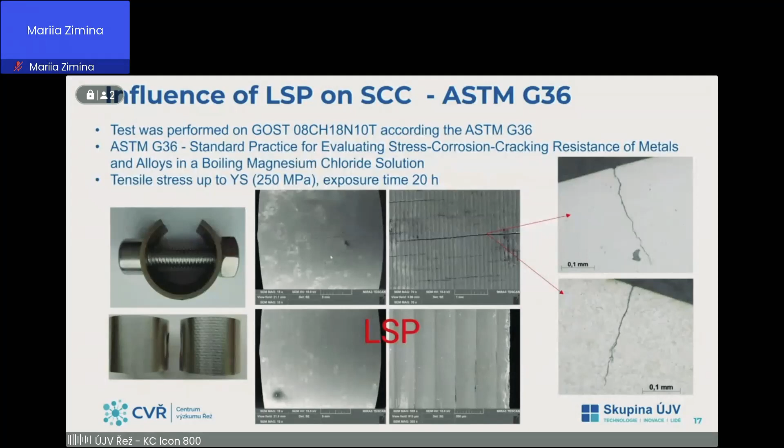You can see in the area with maximum tensile stress, many cracks were observed with a depth of approximately half a millimeter. On the treated specimen, we didn't see any cracks. It was a very simple test, but I think the results are okay and fine.

On this slide are possible LSP applications in power plants. The first one is a method for extending the fatigue life of turbine blades affected by pitting corrosion.

The last blades on turbines for classical power plants, like coal power plants, sometimes have a problem with pitting corrosion. The pitting corrosion is like a notch in the material of the blade, and when the pit is big enough, it can be a problem because from this place a crack can initiate and propagate, damaging all the blades.

The second topic is extension of service life of the heterogeneous welded joint on the secondary circuit of a nuclear power plant, by suppressing the mechanisms of corrosion cracking through applying compressive stress to the root of the weld. There is a problem with stress corrosion cracking between the heat affected zone carbon steel and the weld, and from the root a crack can initiate and propagate along the interface.

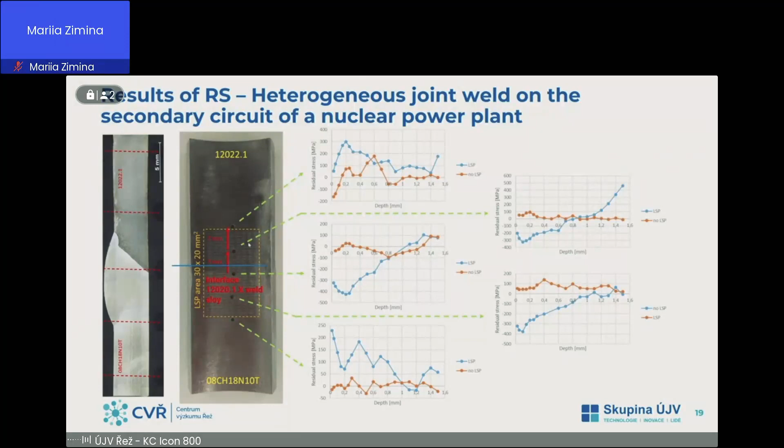Now the last results: an experiment of high cycle fatigue on material for a turbine blade on Böhler T552. The effort of LSP technology is to suppress the notch effect of corrosion pits on steam blades. The issue of corrosion pits on blades, especially low pressure stage blades, has been solved for several decades - it's no problem. The parameters of the experiment are based on research reports and expert articles for reloading of the blades.

This was for an L-1 steam turbine, 110 megawatts. The artificial notch was made by laser drilling. The diameter of the notch was 250 microns and the depth was 500 microns. And here is the specimen.

We used a peening strategy with only three shots, as you can see in the animation. The peening area was 4 by 2 millimeters with 3 spots. The goal of the peening was to redistribute maximum compressive residual stress nearby the notch, because we know how crack initiation and propagation occur.

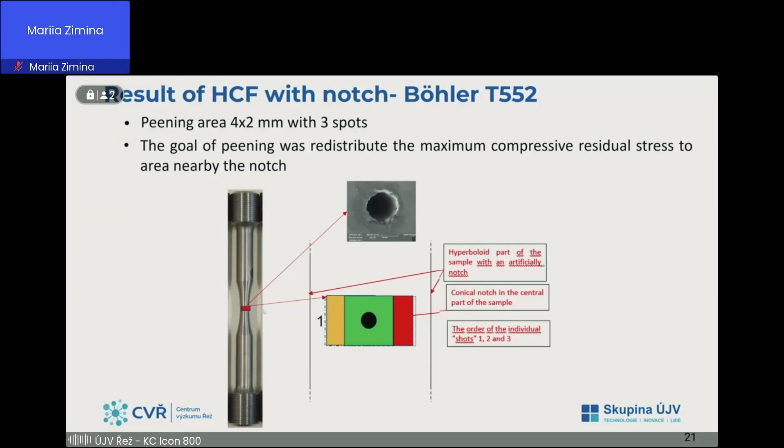Here is an example of how the notch looks before and after LSP. On the left is the base material with a notch, without LSP. In the middle is the first LSP modification with 1 layer, and on the right is LSP with 3 layers of peening. Top right is the corrosion cell which we used for mechanical testing in a corrosive environment up to 100 degrees Celsius.

Here are the results from the high cycle fatigue test in SN curves. Curve 1 is samples without defect, with a polished surface - the fatigue strength was evaluated at 380 megapascals. Then we tested the same sample but with an artificial pitting notch - that's curve 4, and it drops, with fatigue strength decreasing to 80 megapascals. Curves 2 and 3 are in between, showing fatigue strength increasing from 80 megapascals up to 280 megapascals.

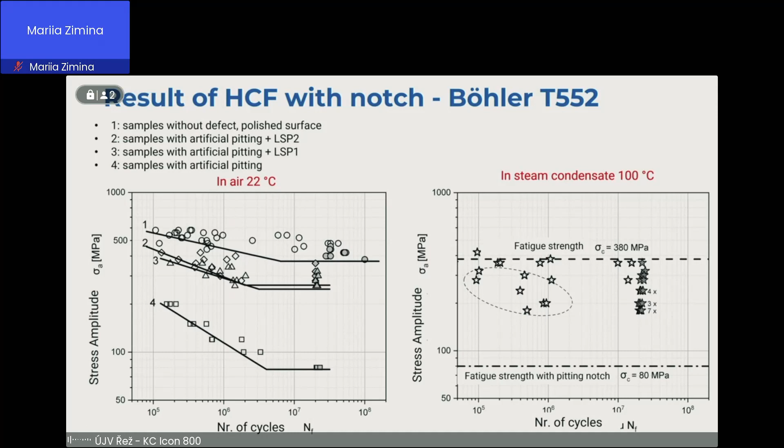Last piece of information: we performed fractographic analysis on all specimens. What's interesting from this analysis is that the fracture mechanism of recognition is the same in all series, with and without LSP, and with and without notch.

The reason for crack propagation in radial direction is the applied compressive stress on the specimen surface near the notch, which blocks the crack propagation along the specimen surface.

Crack propagation in radial direction is slower because the condition for crack propagation in radial direction is more energy demanding.

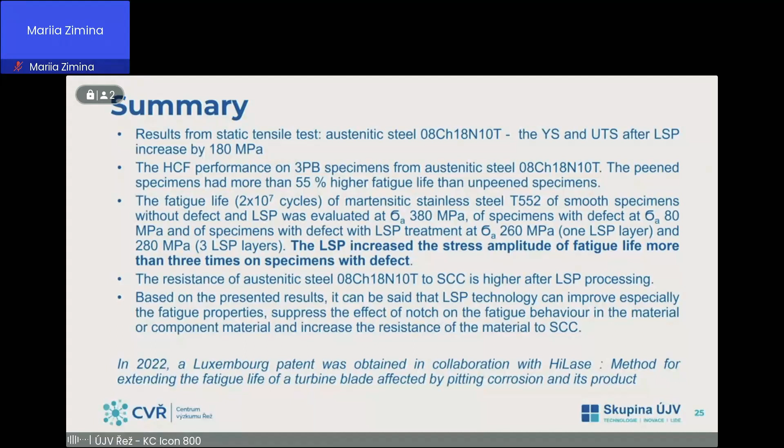And summary. There are some results from mechanical test. Based on the present results, it can be said that LSP technology can improve especially fatigue properties, suppress the effect of notch fatigue behavior in the material or component, and increase the resistance of material to stress corrosion cracking. Okay, thank you for attention, and that's all.

I thank Mariia for her presentation. Obvious question, do you have any question to what you heard just now?

Presentation of today, after so many interesting information related to material research, methods, corrosion, even advanced manufacturing, you will hear something about material degradation, specifically material research for the high temperature gas-cooled reactor applications.

Since you stayed here until now, you see that there is already organized some show. We are three for you. I will shortly introduce the topic, say a few words about the fuel cladding materials, and then my colleague Jan Becker, who is actually the expert and the one doing the research on high temperature materials for HTGR technology from the beginning of CVR, and our young colleague, continuing the material research. So let's proceed.

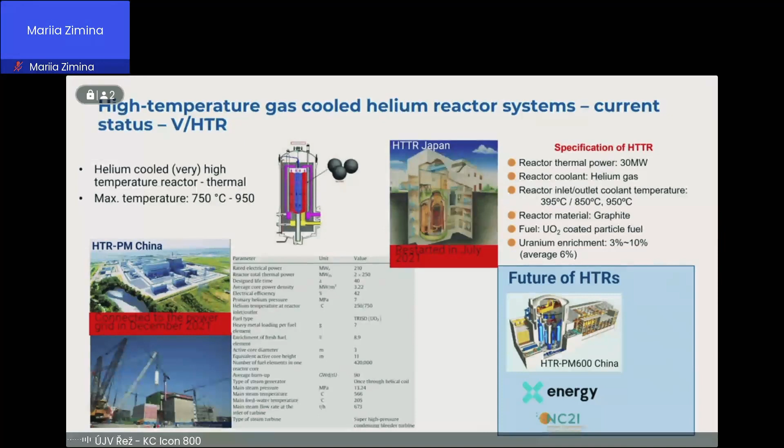I will not go into the specification. It's also a pebble graphite reactor, and that technology the world is going farther with. Chinese are already thinking about the HTR-PM600, using the HTR-PM they have now by putting more modules together, having an even bigger facility. There is also US company X-Energy who are developing this technology. They have already licensed the fuel line, production fuel line, and in Europe there is the nuclear cogeneration group led by Poland, who are thinking to start directly from zero nuclear power to HTGR technology next to Świerk, the research reactor. So we shall see what will be next.

Then there is also a fast spectrum gas-cooled reactor. You can't see yet any example, and I would say it is still a long way for the application, because there are many challenges, not only material challenges, but safety, of course, and fuel cladding.

Nevertheless, the group of Visegrad countries, together with France, is working on the Allegro demonstrator. It shall be 75 megawatt thermal power with maximum temperature 850 degrees centigrade. All those reactors are, of course, helium cooled, high pressure 7 megapascal.

So you can see the Allegro on the left-hand side, how it could look like. Then there is also the parameters in the table. You will have the presentation so you can read it.

There is also a very new project of ÚJV, who are going in a direction I'm personally calling this PowerPoint small modular reactors. We have done many, which is called HeFASTR, which is also a gas fast reactor. But for both types valid that there are a lot of challenges, and I think very important to be solved is the fuel cladding.

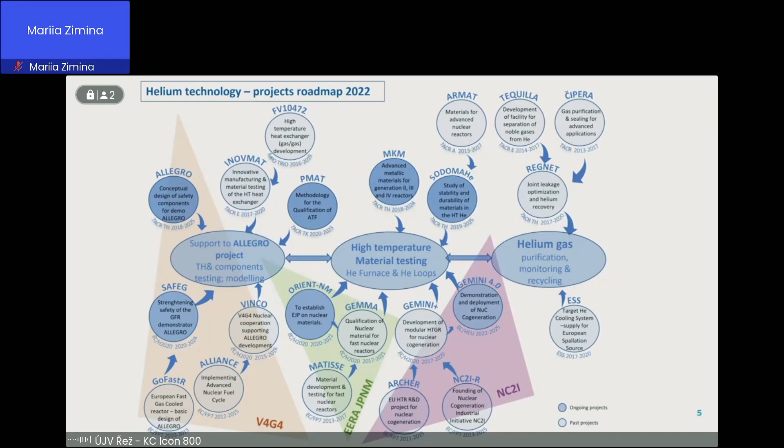So this is a lovely picture of all the projects which we are having or which we had, ongoing, related to high temperature helium technologies, because we have here several experimental facilities devoted to either material research, thermohydraulic and components testing, or gas purification. I won't go into details.

Because this is a conference on materials, so devoted to materials, we go to materials which are usually candidate and selected for these high temperature helium reactors.

There are many components, from the pressure vessel, either HTR or GFR, which can be probably from ferritic, but most probably austenitic steel for GFR. Then we have the secondary circuit that must be from nickel-based alloy. At this moment, there is the coded 800H, but also 617 nickel-based alloy.

Then we have, for several phases, candidate material for cladding: 15-15 titanium, which Lukáš already presented for the LFR condition. And for the higher temperature, for phase 2 of the Allegro, where 850 degrees is expected, we are researching ceramic materials.

You may know all our facilities, but I will just quickly go through. There are several loops where we can study material behavior in flowing condition. Then we have also a static condition in the high temperature furnace. And of course, with all this, we would not do anything without the material characterization laboratories, where the high temperature corrosion is described and the mechanisms explained.

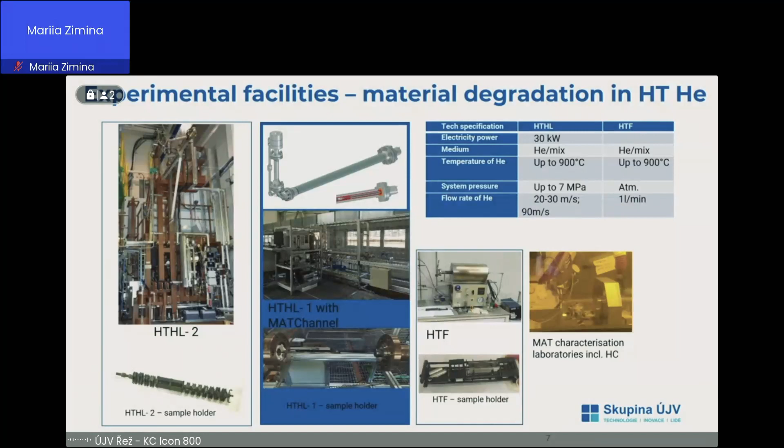Our designers are doing their best to supply us with such a test channel. And these are already results of testing such material for cladding. It was a cladding tube of 15-15 titanium steel. Then we also had, for comparison, coated 15-15 titanium steel within the GEMMA project, under the Joint Program Nuclear Materials.

The mechanism of high temperature corrosion is similar. There is oxidation, even though there is a very low amount of oxygen in the helium, but nevertheless there's always some oxygen or moisture, even in real reactor conditions. So this is the driving force for oxidation, which is actually beneficial for metallic materials. A chromium oxide layer and spinels are formed on the surface, which form a homogeneous, protective layer.

I can't say this the same for the aluminium-based coating, which was produced by IIT Milano, the Italian Institute of Technology, with pulse laser deposition. Shortly, the coatings are not suitable for 900 degrees centigrade, and further development is needed if this application shall be used. There were cracks and they fell off. They were also disintegrating based on composition.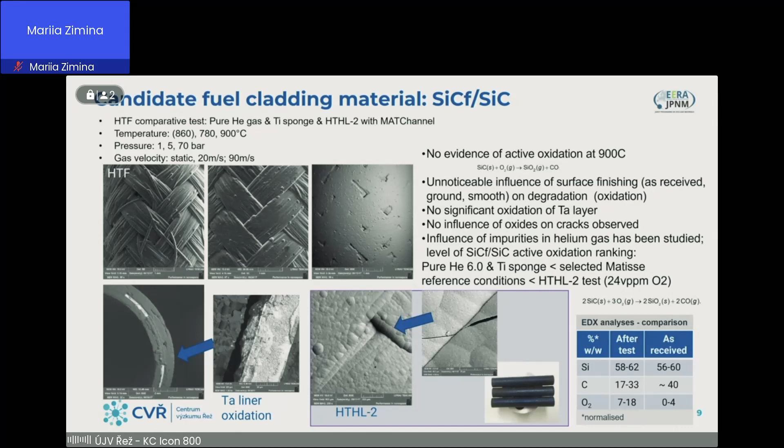As I said, not only improvement of the surface composition and sealing, but also joining and coating. Since the silicon carbide material is also one of the ATF candidate cladding materials, the development is not going only for the GFR. So maybe there will be one day when it will be at a stage where it's possible to use and standardize for the cladding.

And that's all from me, and I'm glad to give the floor to Jan, and we will continue.

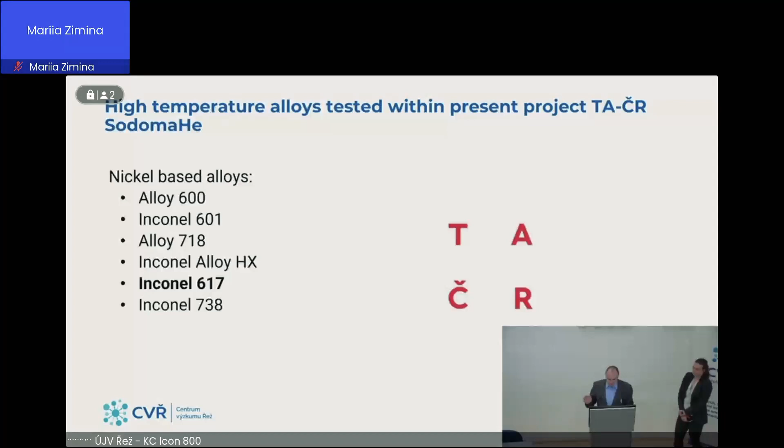So thank you, Jana, for very nice introduction and also results. During the present project, TA-ČR SodomaHe, which was mentioned on the slide, the special nickel-based alloys which are available on the Czech market will be tested. Also, Inconel 617 was included in the testing program. This alloy is regarded as the best candidate material for components which have to withstand very high temperature, for example high heat exchangers and other high temperature components. Also special ceramics, high temperature ceramics, will be tested within the new, relatively new project TA-ČR.

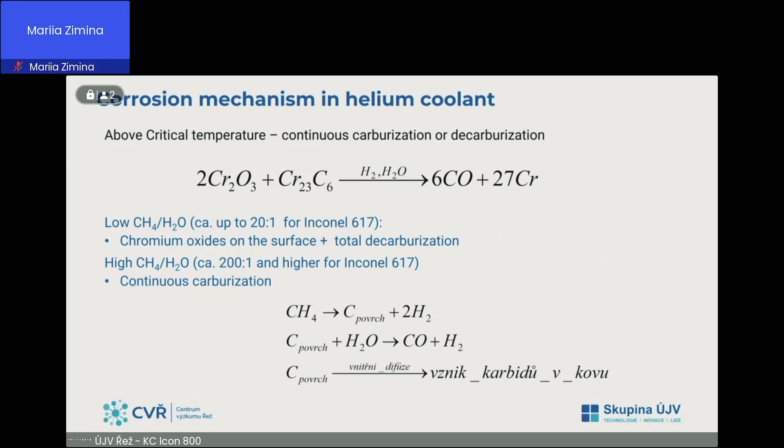So this is some theory from literature about what happens with materials in high temperature helium. Everyone knows that helium is an inert gas, it doesn't react with anything, but the helium coolant contains some typical impurities. The mechanism of corrosion is carburization, decarburization, or oxidation. It depends on the partial pressure ratio of these impurities. Below the critical temperature, which is around 900 degrees centigrade, in conditions with good ratio of partial pressure of these impurities, a compact and protective oxide layer can be formed. Above the critical temperature, the protective layer is unstable, so continuous carburization or decarburization takes place.

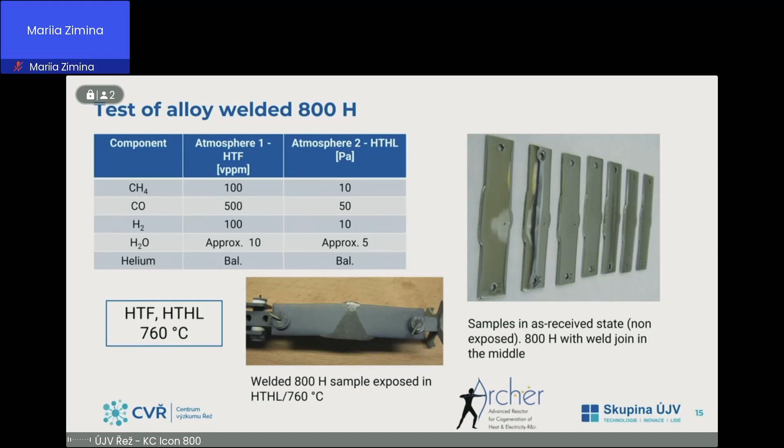So this is the theory, and now some testing results from the finished project. One of the first tested alloys was the welded alloy 800H within the Archer project. The samples contained the weld joint filled with Nicrofer, and the alloy was exposed both in the furnace and in a high temperature helium loop.

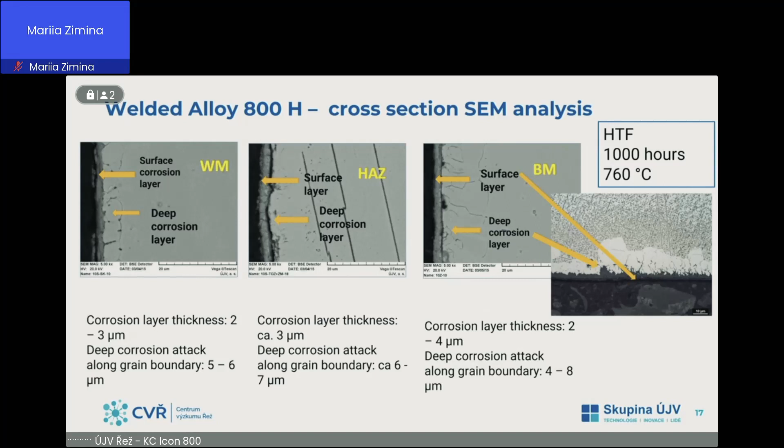These are the pictures of exposed samples in the furnace. The surface layer was relatively compact and homogeneous, but in the heat affected zone, spalling of the surface layer was observed. On the cross-section of the samples—weld metal, heat affected zone, and base metal—the compact surface layer made of chromium oxides was observed, and under this layer corrosion attack along the grain boundaries was found. The samples exposed in the helium loop showed corrosion similar to that observed on the furnace samples, also including spalling in the heat affected zone.

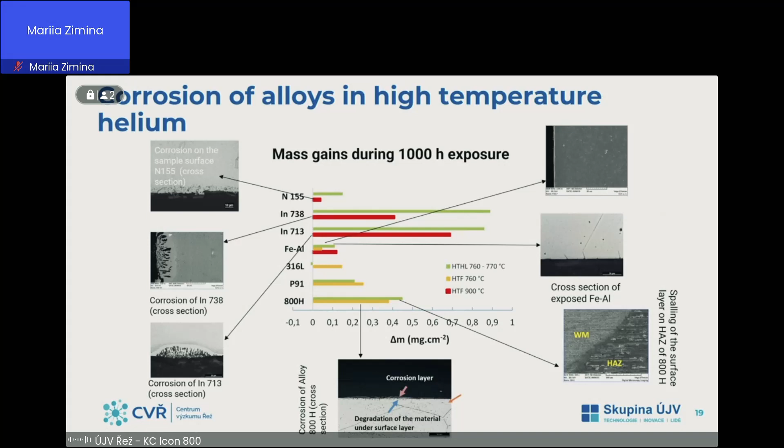So what we also tested was the effect of recycled alloy content on alloy properties. This was done in cooperation with a casting company. What was the goal of this investigation? During the production of high temperature components by precision casting, a relatively huge amount of waste alloy is produced. This waste alloy is returned back to production and blended with virgin material. The question was whether the revert material influences the quality and mechanical properties of the alloy.

As-received samples and also exposed samples were tested, and some differences were recorded. The conclusion of this investigation was that revert material influences the quality of the cast alloy, and for stable production quality a ratio of at least 20% virgin material must be maintained. More details can be read in the paper which was published with Daniela.

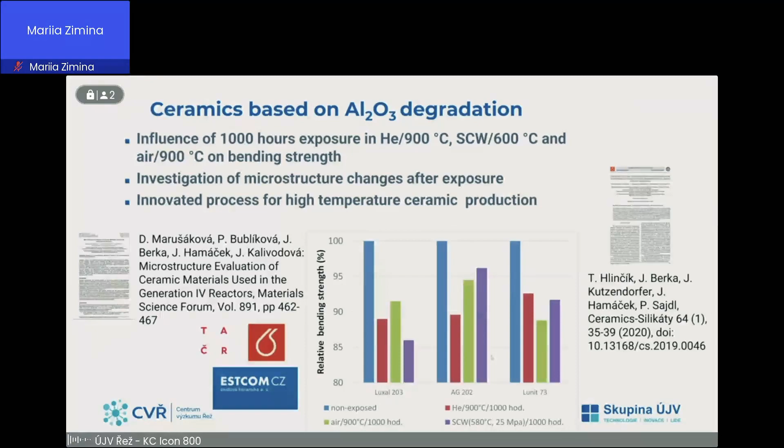Within the project we also tested the mechanical properties of selected ceramic materials based on corundum or mullite. These ceramic materials were exposed in different environments, among others high temperature helium. In some materials, some differences in bending strength were observed after exposure, but the differences were not significant.

We tested not only the mechanical properties of ceramic materials, but also the electrical and insulation properties. The goal was this: as you know, the electrical resistance of ceramic material decreases with increasing temperature. So the cordierite ceramics, which we previously used as insulating materials for heating elements of our experimental devices, is not sufficient for such high temperature as 900 degrees centigrade. So we looked for new materials, and we found that the electric resistance of corundum is much better than that of cordierite ceramics. So we developed new insulating elements from corundum, which is used in the high temperature helium loop.

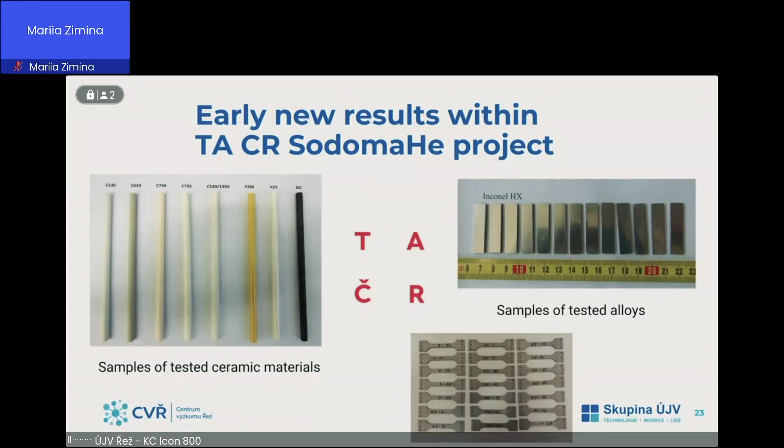Some new results within the Sodomahe project. This result was attained in cooperation with Terka during our work together on her diploma thesis. I am glad that Terka is here with us today. Terka, are you looking forward to working again in Řež next week?

Yeah, I look forward to starting work here next Tuesday. I'm glad. Can you tell us a few sentences about your diploma thesis? Yeah, sure.

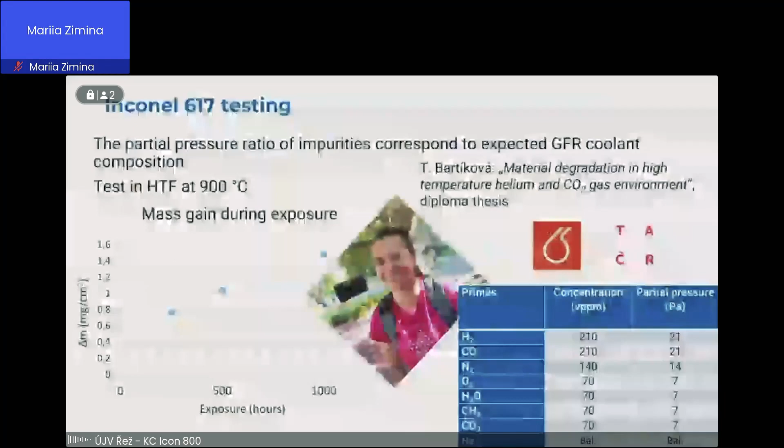Hello, my name is Tereza Bartíková, and I would like to present a small part of my diploma thesis focused on material degradation in high temperature helium and carbon dioxide gas environment. Dr. Berka was the supervisor of my diploma thesis, and all the measurements were performed here in the research center Řež. We tested Inconel 617 in coolant simulating gas fast reactors.

On the table on the right, you can see the impurities, concentration, and partial pressure. On the left, you can see the mass gain during exposure. I'm also very grateful to Jan Procházka, who spent dozens of hours with us analyzing the oxide layers.

Here we have results after 1,000 hours of exposure at 900 Celsius. On the first SEM image of the surface, we found a pretty nice compact corrosion layer. It contained mainly chromium and oxygen, and small amounts of titanium and manganese. On the second and third cross-section images, the surface layer is formed from chromium oxide, and the oxidation layer under the surface is formed from aluminum oxide. I'd like to mention that the test continues up to 3,000 hours of exposure.

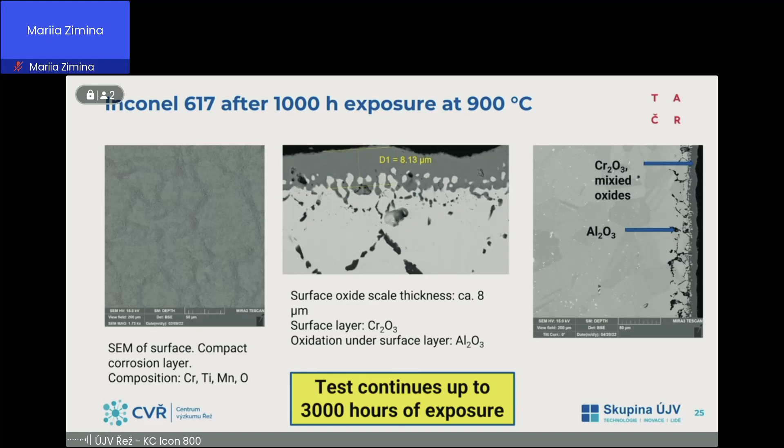So thank you, Terka, for the short introduction to your diploma thesis. The test will continue, and we will see new results after longer exposure.

When I was working on this presentation, I got the idea to compare the results of high temperature corrosion of Inconel 738, obtained during the finished project, with the hot corrosion of 617. As I said, the corrosion of the 738 alloys was only local, compared to 617 on which a compact layer was formed. Also, the mass gain of Inconel 617 was about three times higher than that of Inconel 738. But we will see further results, because Inconel 738 was also included in a new experimental program.

Last but not least, new data about the bending strength changes of new ceramic materials exposed in hot helium, and for comparison also in hot nitrogen, was obtained and published. Also in this case, the differences were relatively negligible.

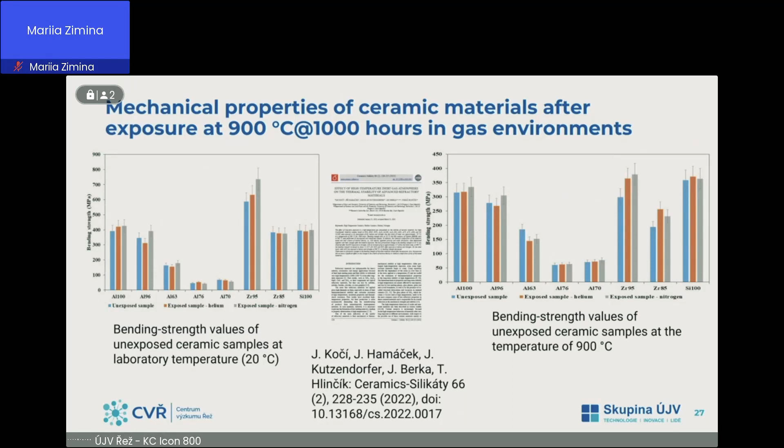So, what's to say in conclusion? As we said, CVŘ is involved in projects related to materials for high temperature helium technologies, and within this research program we cooperate with universities and also industrial and research organizations. So the results are not only data about the corrosion of materials, for example pictures and graphs and so on, but also results of applied research such as prototypes, utility and industrial designs.

The program continues. Just for your information, the helium loop is now in operation, so new samples for Terka are expected. Let me mention that another program is aimed at technologies themselves for gas-cooled reactors, and there are also some important and nice results there, but that's another story.